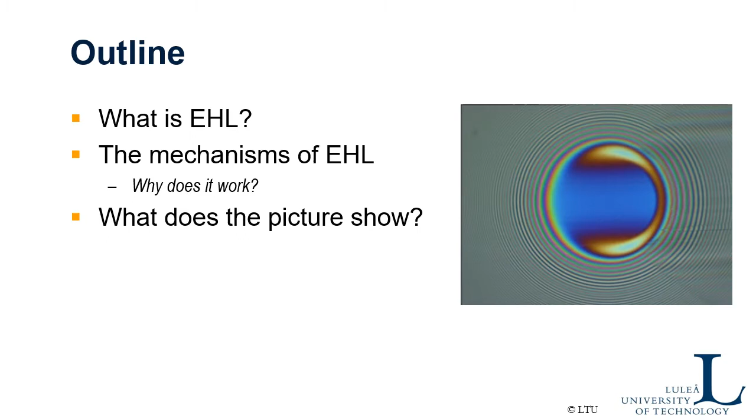So, starting with the first question, what is EHL? Well, EHL is, as I said, elasto-hydrodynamic lubrication. It's about lubricating non-conformal surfaces. You may remember from the contact mechanics that you have a non-conformal contact in between, for example, two rollers like this, or like the roller and raceway contact in a roller bearing. So it's a very small contact region, and of that reason we have very high contact pressures. We normally talk about gigapascal levels of pressure there.

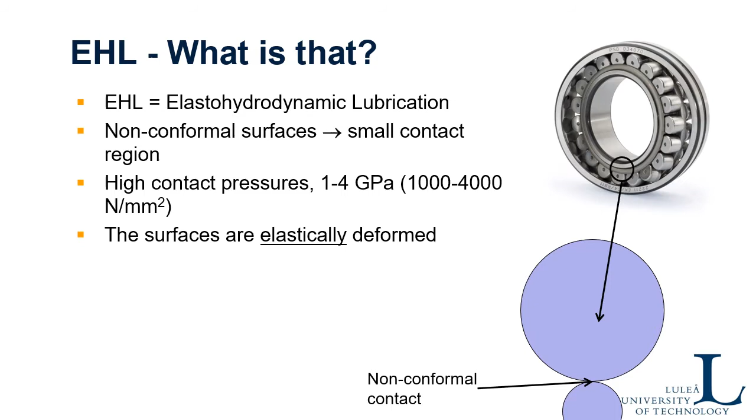And since the pressure is high, the surfaces will become elastically deformed. And they should be elastically deformed. They mustn't be plastically deformed, because then you damage the bearing. And since the pressures are high and the contact is small, the lubricant films normally become very thin. They are normally much thinner than 1 micrometer, but that can still be sufficient. And apart from rolling element bearings, you also find EHL in, for example, gears and cam mechanisms.

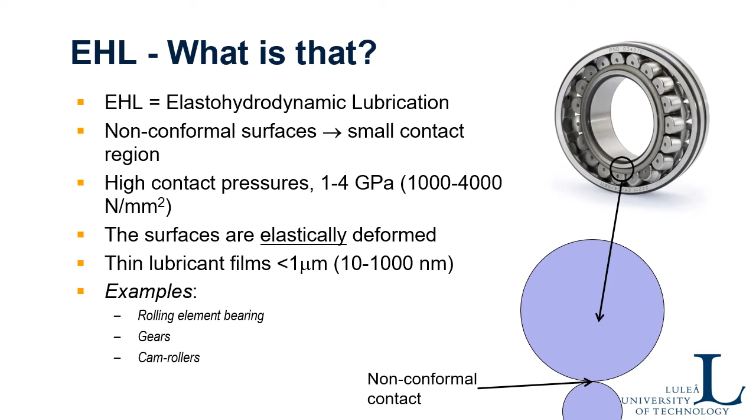If you compare a non-conformal bearing with a conformal one, like the rolling element bearing here and the journal bearing here, you may think that, okay, a journal bearing with very low contact pressure and also thicker lubricant film should be better from a performance point of view. But actually they have about the same load carrying capacity, and you can think about that. How can that be possible? Stop the video for a while and think about it for a few minutes, and then we will try to explain it in this video.

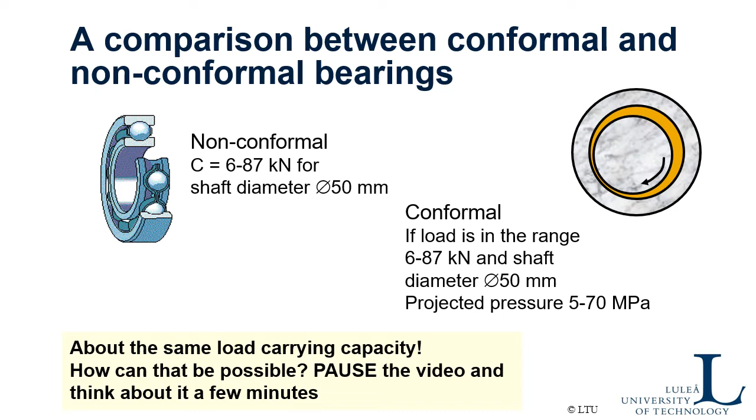First, I want to describe some different types of EHL. When we talk about machine components, then we normally talk about non-conformal hard EHL, as I have already been mentioning with the bearings. And this is a hydraulic motor where you can find a cam mechanism. For example, here is a roller and here is a cam. That's a typical hard EHL contact, non-conformal steel surfaces typically. But you can also find non-conformal soft EHL, like the contact between the tire and the road. That is definitely a deformed contact, and the same goes for a lip sealing contact with a surface.

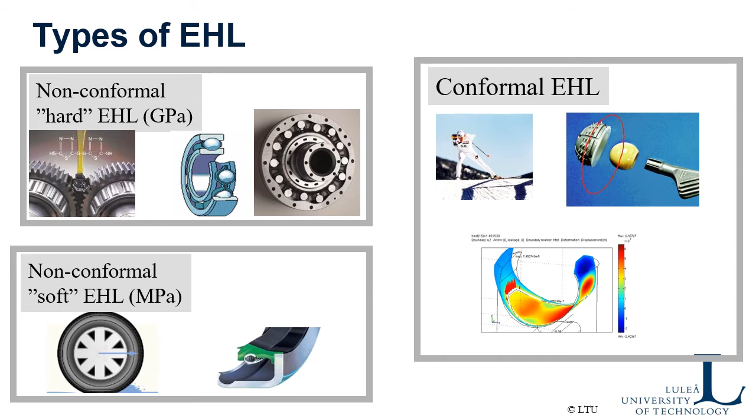But you may also find EHL in conformal contacts. The pressures can be high enough to deform the surfaces in such a way that it influences the lubrication itself. This is actually from the same machine here. This is a hydraulic motor, so in another part of the machine you can find conformal EHL. In a hip joint you may find that too, and even in skiing you may find conformal EHL. So I'll discuss a little bit how a film is formed here and why it is formed.

Starting with the contact mechanics a little bit and the non-conformal contact. As we have been discussing already, when you put a cylinder, for example, in contact with a flat surface, then you end up with a very concentrated force and a small contact region. So in this case, at a low load, you have a pressure like this. It's concentrated. It's a very narrow contact. If you compare to the radius here, you don't see the full radius of the cylinder here.

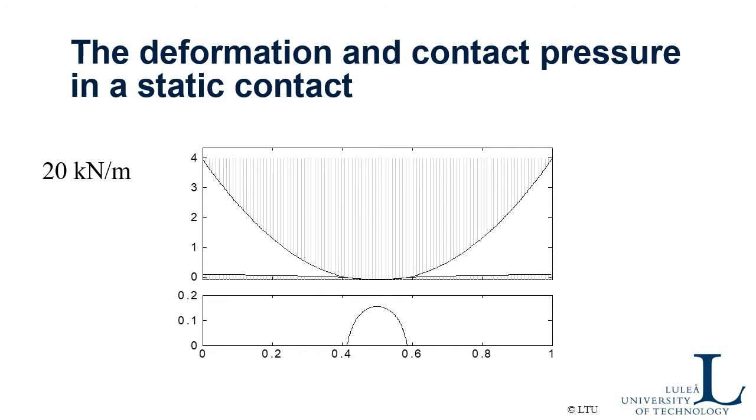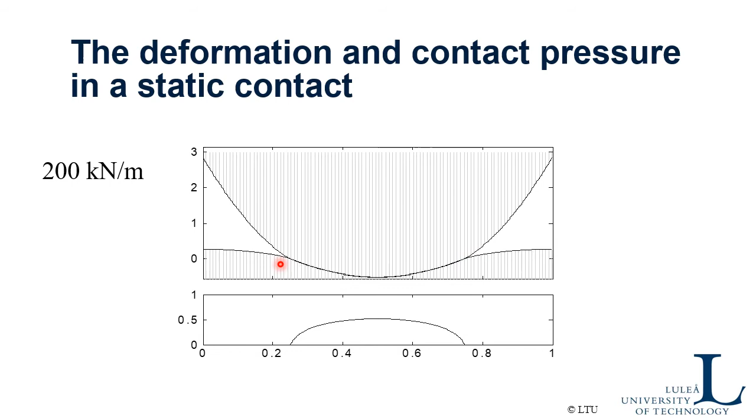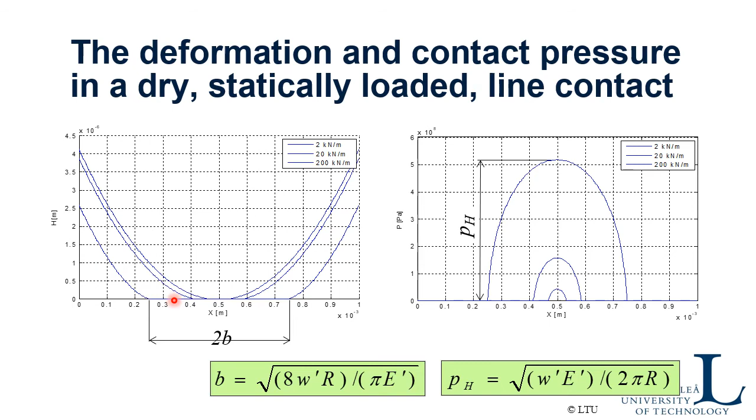So now you can see here in this case the pressure was half a gigapascal approximately, but if you continue to increase the load, then you make it bigger and bigger, and you reach maybe several gigapascals, and the contact width will then grow also very much. So what you form here is a contact which is relatively large. It's maybe just a millimeter or less than a millimeter, but there is a possibility to see it as a flat region to be lubricated.

So if this is a dry contact, and you start moving the surfaces, you can see here that you form the wedge you really want for hydrodynamic lubrication. If the two surfaces are rolling, which is the case in a bearing, for example, the surfaces will bring lubricant into the wedge and then force the surfaces apart due to the pressure formed by the wedge effect here. For that reason you form a thin film, and it is very thin. It is very much thinner than the length, but it is a typical hydrodynamic film, which is typically much thinner than its length.

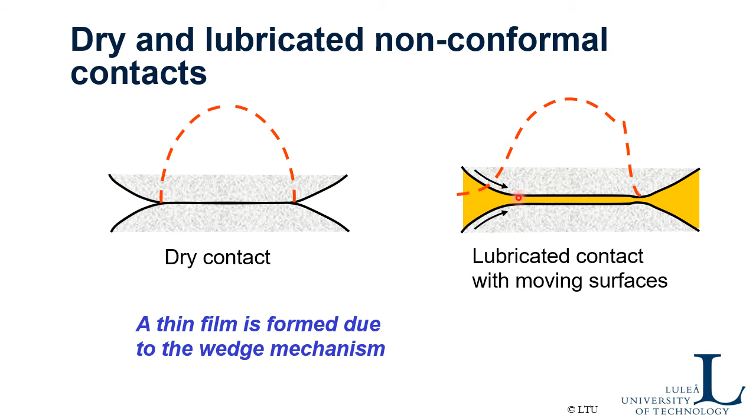So this figure shows the typical features of the EHL contact. It's a little bit exaggerated here. Remember that this contact zone is maybe only 1% of the diameter of the rollers. But still, you bring in the lubricant with the motion of the surface here. You form a relatively flat part here, a constant film thickness, but then you actually find the thinnest part of the film at the very exit of the contact.

So here the pressure falls to zero again. And that is the typical feature of EHL contact, and it is followed by a pressure distribution in the lubricant that looks something like this, and it's following the Hertz dry contact pressure very well, apart from here at the inlet where the pressure is built up a little bit before the Hertzian pressure distribution. And there is something strange here. It's what we normally call the pressure spike.

This behavior can be explained in the following way. It's a kind of continuity problem here. When you bring in lubricant here, if this is a line contact, it's infinite into the screen, an infinitely long contact. So the lubricant can only move in the horizontal direction. So you entrap some lubricant at the inlet, you move it through the contact, and you squeeze it out here in the outlet.

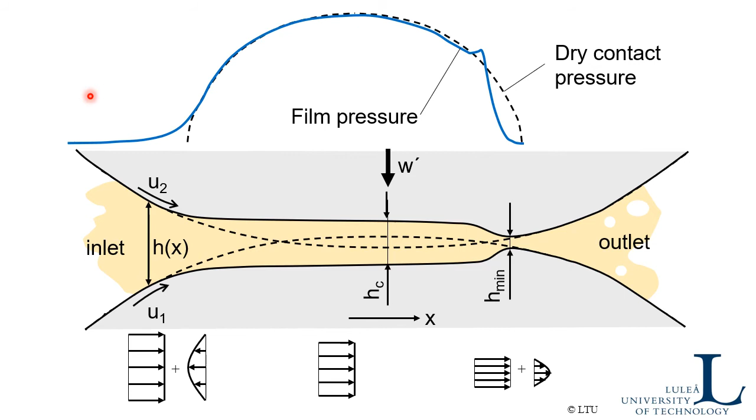So the explanation to the pressure spike and to why the minimum film thickness occurs at the very edge of the contact is flow continuity, together with the force equilibrium, of course. Those two are the natural laws that we always must follow in mechanics.

So a little bit about the figure I showed in the beginning. In order to explain that, I must explain some interferometric measurement techniques, which are normally used to study EHL. In a model EHL contact, you form it by a ball in contact with a glass disc. On the glass disc, you put a semi-transparent chromium layer, which is a beam splitter. So if you shine light through the glass, part of the light is reflected in the chromium layer, and part is reflected in the ball.

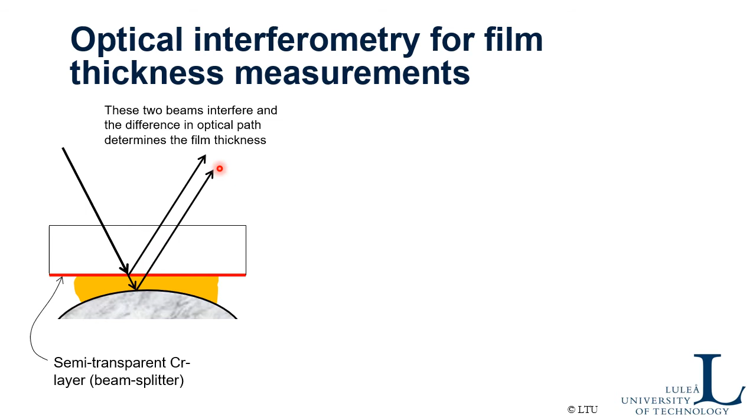Since this distance is very small, about the same order of magnitude as visible light wavelengths, these two beams can interfere with each other, and we have equipment to do that, and you create a pattern like this. You recognize the Hertz contact zone, in this case a ball on a flat disc. In the center of the contact, the blue light interferes constructively, so the blue color is much stronger than the other colors, and you see a blue part here.

Each color actually corresponds to the same thickness of the lubricant film. When you get some experience, you can see that the film thickness is the thinnest here and here, and it's also very thin along the rim of the contact. So the absolutely thinnest film in the EHL contact is formed along the edge of the Hertzian zone, and in here it's relatively flat. It's the same in a circular contact as in the line contact I showed, but in this case the thinnest film is here and here. So that is the explanation to the colorful picture here.

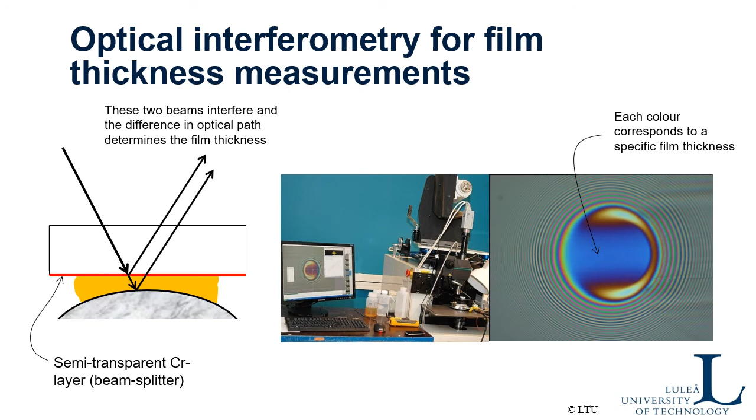And we can translate this colorful interferogram into film thickness maps. So this is what I said, and the flat part here where the film thickness is about the same, and along here the edge the film is the thinnest.

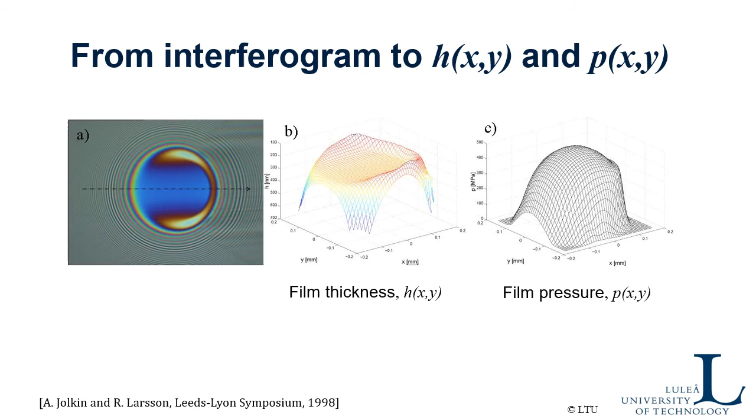And you can also compute what kind of pressure do you need in order to get that behavior, and then it looks like this. And you can see a small thing here, that is the pressure spike, or now it's a kind of pressure ridge, maybe we can call it. It goes around this contact here. So that's both a line contact and in this case a circular EHL contact.

Okay, now I have tried to explain that there is a film formed, and the wedge mechanism is active here, but still it's a fluid. The oil or the lubricant is a fluid, so we must ask ourselves also, why isn't the lubricant just squeezed out from the contact when you have so extremely high pressures like gigapascals in the contact? So then we have to take a look on viscosity here of a typical lubricant, a typical oil.

If you measure the viscosity at different pressures, so in this case pressures which are relevant for EHL like gigapascals, you can see that the viscosity may increase significantly. It's something like 5, 6, 7 orders of magnitude. That means that if it was a fluid at atmospheric pressure, up here at gigapascal pressures, it has some crazy numbers in viscosity, and that means it's almost like glass, or it's more like a solid than a fluid.

And normally we use this expression. This is very approximative, but it's a good way of thinking, a good way of explaining the influence of pressure on viscosity. So it's actually an exponential function here. And the alpha here determines how much the viscosity increases with pressure. So for typical mineral oils and synthetic lubricants, you end up with an alpha that is in the neighborhood of 2 multiplied by 10 to the power minus 8.

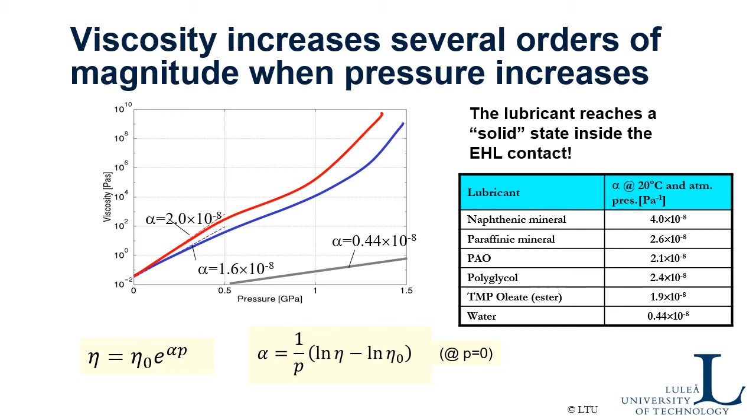So putting the numbers in here, you will see that you get very large viscosities at pressures in a gigapascal range. If you multiply this number by gigapascal, you end up with a number like in this case 26. So E to the power 26, that's a lot. But if you take another fluid like water, the number is much smaller, but putting it here, E to the power 4.4 is a much smaller increase of the viscosity, and that's the explanation to why water isn't a very good lubricant for a ball bearing, for example. So it doesn't give you the same high viscosity.

So having now this in the back of your head, knowing that the viscosity is extremely high, then you can compare an EHL contact with a football pitch. So if you increase everything to the size of a football pitch, and you take the same correlation between length of the contact and the thickness of the film. In a typical ball bearing, the length of the contact is order of magnitude 1 millimeter, while the thickness of the film is something like 10 to 100 nanometers. Taking the same for a football pitch, which is around 100 meters long, then the film thickness is something like 1 to 10 millimeters.

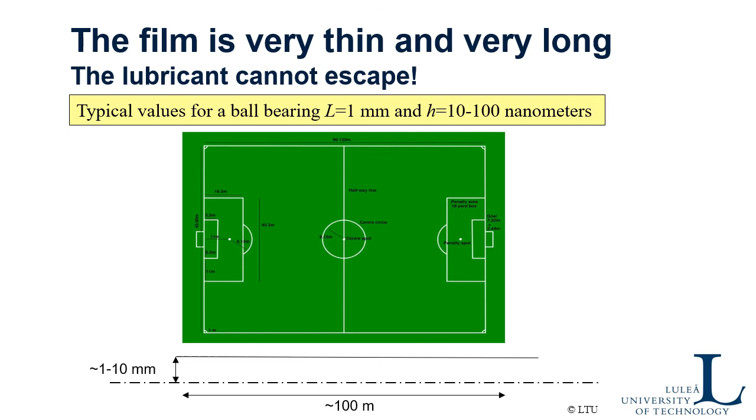So if you put the lubricant here at the center spot and you try to squeeze it out, especially when you have a very, very high viscosity, to the edge of the football pitch, you can understand that it's not very easy. So the solidified lubricant in the contact is very much trapped here. It doesn't have the time to be squeezed out during the short moment it takes for the roller to roll over the lubricant on the raceway. So that's the explanation to why the film can't escape from the contact.

So finally, we are coming to the end of the video, and to the answer to the question that was raised in the beginning: the comparison between a non-conformal bearing like a ball bearing and a conformal type of bearing like the journal bearing. Why do they have about the same performance, about the same load carrying capacity? Well, the answer is partly because a sufficiently thick film is formed in both cases. It is formed also in the non-conformal case. Even if it's thinner than in the journal bearing, it fully separates the surfaces.

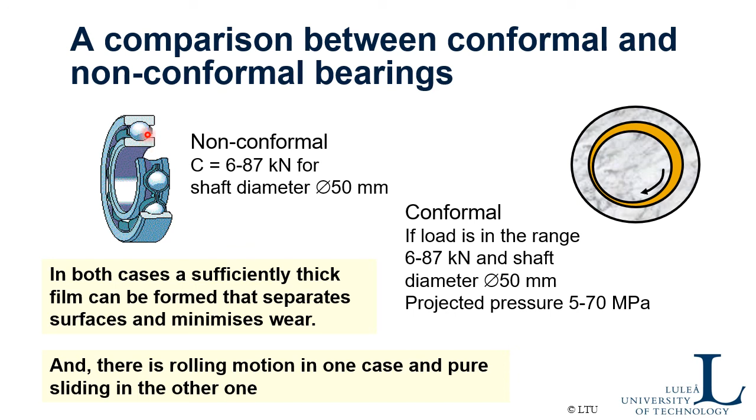So that was a short introduction to elastohydrodynamic lubrication. In other videos, I will talk about how thick the film will be, and the parameters influencing that. I will also discuss friction in yet a second video.